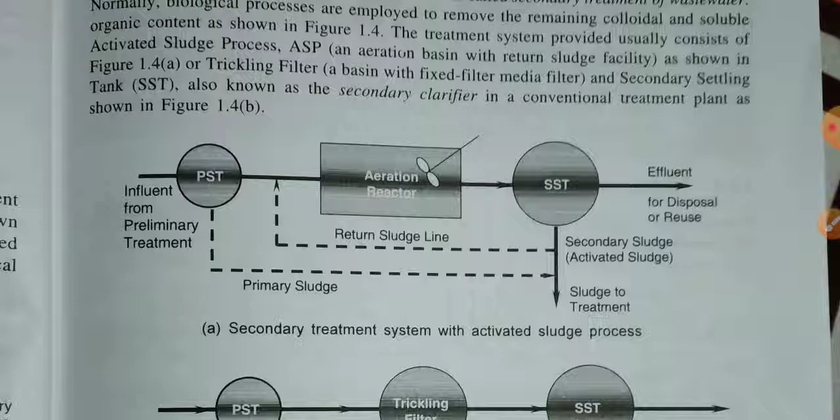Okay, now the simple discussion part for a tertiary or advanced treatment system. If the effluent from the secondary treatment system is further treated to reduce or remove the concentration of residual impurities, it is called tertiary or advanced treatment of wastewater, and tertiary treatment is normally provided when it is found that the quality of conventionally treated wastewater, the treated effluent, is unsuitable to meet the limit of final disposal into the body of water or onto the land.

Okay, the concentrations of residual organic material and suspended solids require further reduction or complete removal for specific reuse or recycling of wastewater. After the secondary treatment, the concentration of residual nutrients such as nitrogen and phosphorus is very high for final disposal or reuse and recycling of wastewater. Okay, first of all write down these three points in the notebook. I am doing a revision. Note down all these points for a tertiary or advanced treatment system.

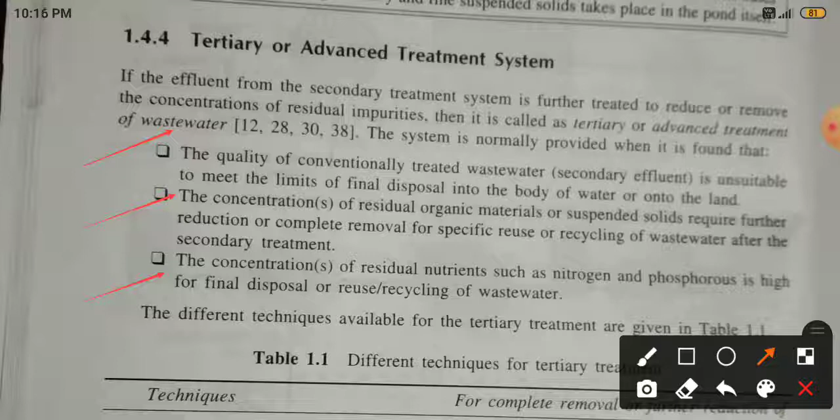Now the different techniques available for the tertiary treatment are given in table 1.1. Note down all these points, most important, and we will discuss them one by one.

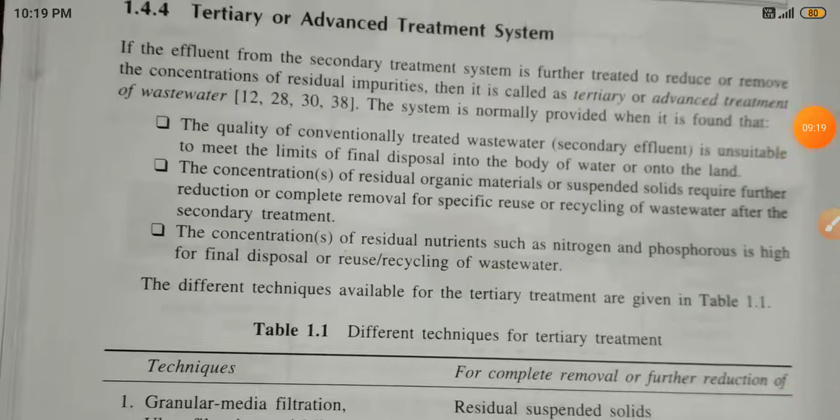The third one is residual nitrogen and phosphorus. Ion exchange, reverse osmosis, electrodialysis, chemical precipitation and adsorption. Now the last one is the residual dissolved inorganic solids, refractory organics, toxic and complex organic compounds. Okay, the treatment systems are expensive and therefore normally used for treatment of industrial wastewater. Okay, so revise all points of the tertiary or advanced treatment system.

If the effluent from the secondary treatment system is further treated to reduce or remove the concentration of residual impurities, then it is called a tertiary or advanced treatment of wastewater. The system is normally provided when it is found that the quality of conventionally treated wastewater, the secondary effluent, is unsuitable to meet the limit of final disposal into the body of water or onto the land, and the concentration of residual organic materials or suspended solids requires further reduction or complete removal for specific reuses or recycling of wastewater after the secondary treatment system.

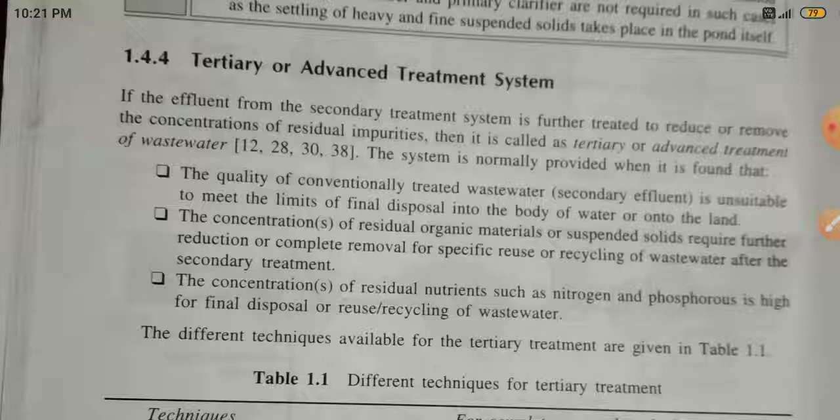Okay, the concentration of residual nutrients such as nitrogen and phosphorus is very high for final disposal or reuse and recycling of wastewater. Okay, these three points are most important. Read and follow these points and the treatment system.

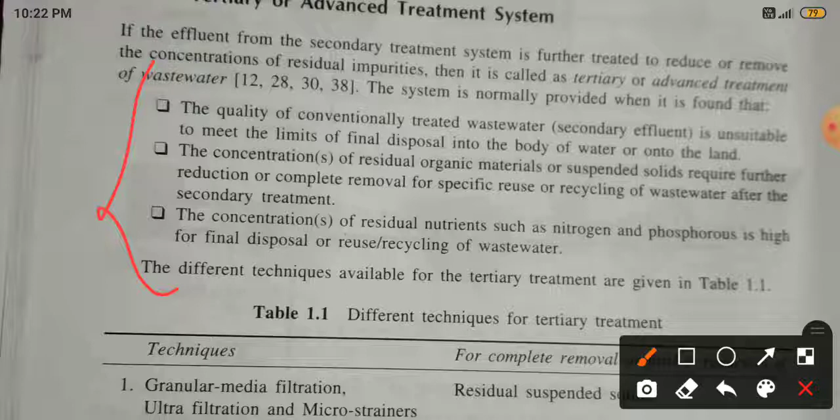Now we will see the points for the different techniques for tertiary treatment. Granular media filtration, ultrafiltration and microstrainer. This is a tertiary system, for complete removal or further reduction of residual suspended solids, and removal of nitrogen, phosphorus, chlorine and dissolved gases.

Now biological nitrification and denitrification, ion exchange and air stripping, for the removal of nitrogen, phosphorus, chlorine, dissolved gases etc. Then biological and chemical processes for residual nitrogen and phosphorus; ion exchange, reverse osmosis, electrodialysis, chemical precipitation, adsorption for removal of dissolved inorganic solids, refractory organics, toxic and complex organic compounds.

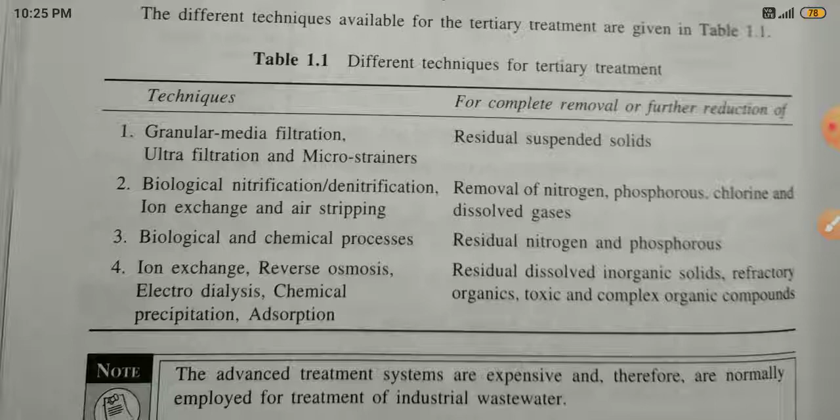Now simply, this point of the treatment system is completely over. We saw the secondary system in the previous lecture; here is its flow diagram, look at it once.

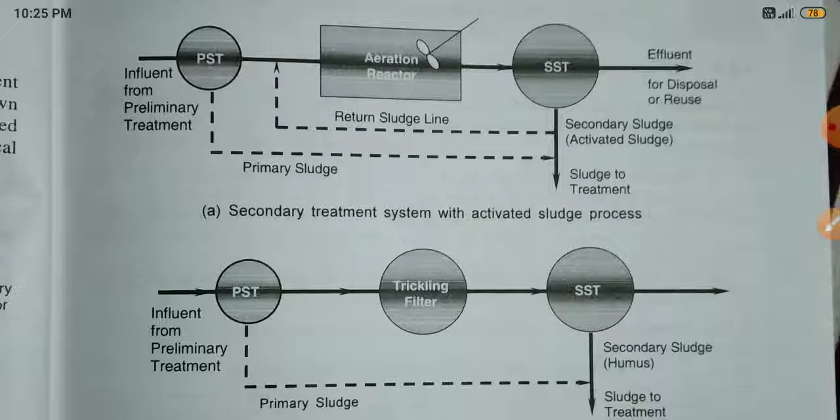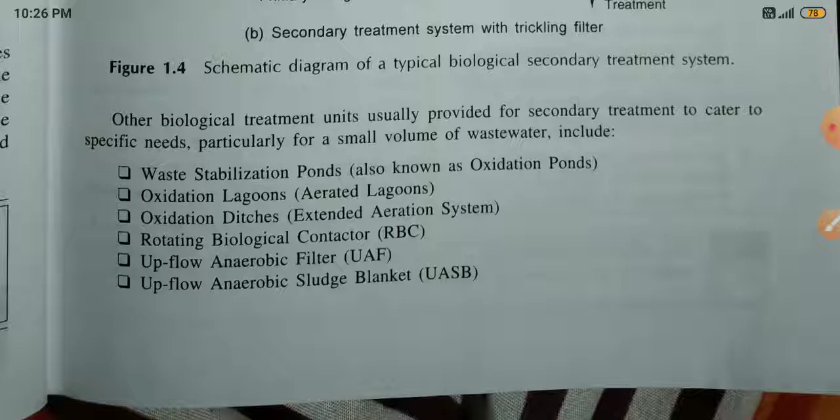The first and second figures and all points: waste stabilization ponds, also known as oxidation ponds, oxidation ditch, extended aeration system, rotating biological contactor, upflow anaerobic filter, upflow anaerobic sludge blanket. This is the final point for the revision part.